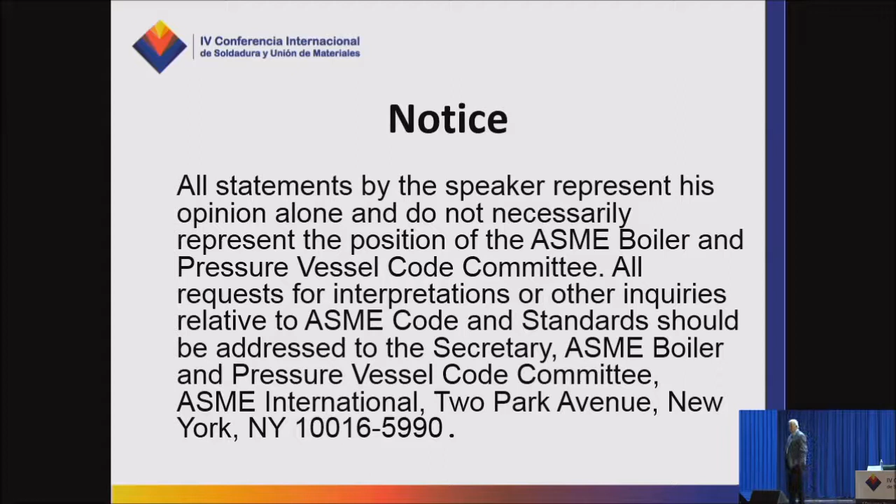As you heard in the introduction, I'm a member of various ASME committees. When you become a committee member, one of the things you agree to is that anytime you talk about the code and interpret it, you have to tell the audience that it's your personal opinion. So what you're going to hear is my personal opinion about the code, not the official opinion. So the code.

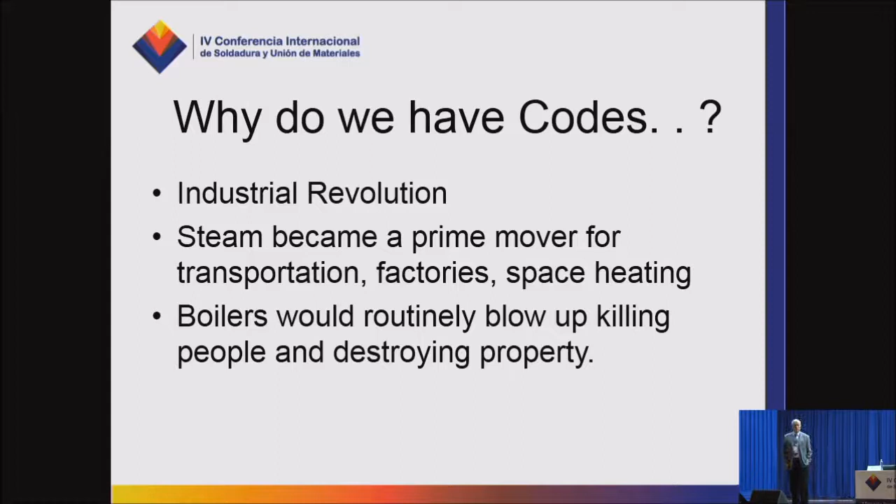Why do we have codes? Well, we have codes because we had an industrial revolution. Steam became a prime mover for transportation, for factories, for heating. In the 1800s, the early 1900s, boilers routinely blew up and killed people. It was not a good situation.

ASME got involved because ASME was already a recognized standards development body. In 1884, ASME published the Performance Test Code for boilers. It was a standard that allowed an organization to measure the power output of a boiler consistently and uniformly.

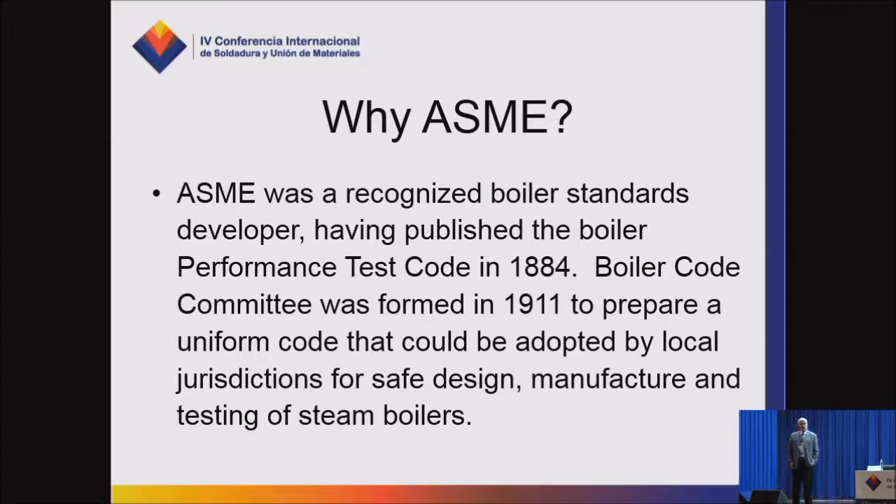The Boiler Code Committee was established in 1911, and it published the first boiler code in 1914. The boiler code was written so that it could be adopted by local jurisdiction to ensure safe design, manufacture, and testing of steam boilers. The first edition was 5x8 format, small, 119 pages long. Today, the boiler code is 8.5 by 11 format, and it's about this big, over 20,000 pages.

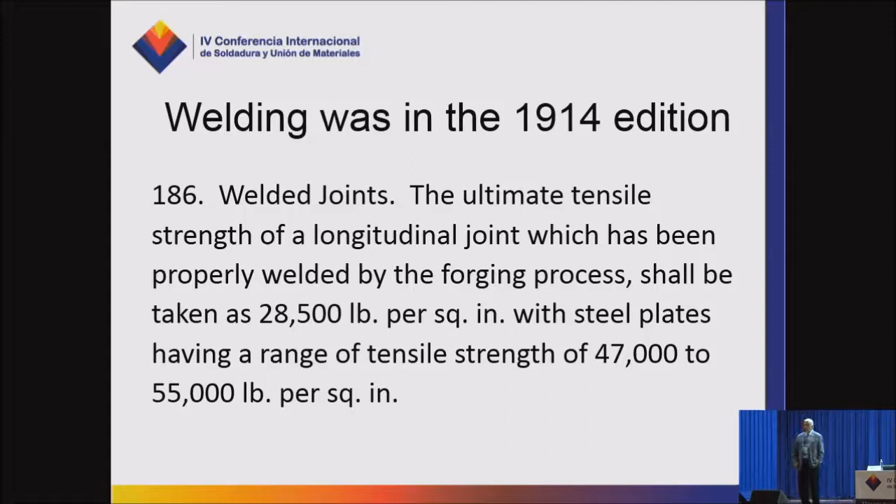Welding was included in the 1914 edition of the code. Who knew: welded joints, the ultimate tensile strength of a longitudinal joint that has been properly welded by the forging process, which hardly anybody uses anymore, shall be taken as 28,500 pounds per square inch with steel plates having a range of tensile strength from 47 to 55,000 pounds per square inch. So welding has been around for a long time and was in the early code.

The boiler code became the Boiler and Pressure Vessel Code in 1928 when Section 8 was published covering unfired pressure vessels. The rules on welding were contained in Section 1, Section 3, Section 8, Section 4. Wait a minute, did I say Section 3? Was there a Section 3 in 1941? There was indeed—it was locomotive boilers, steam engines. Section 3 was last published as locomotive boilers in 1948. In 1963, it became the nuclear code.

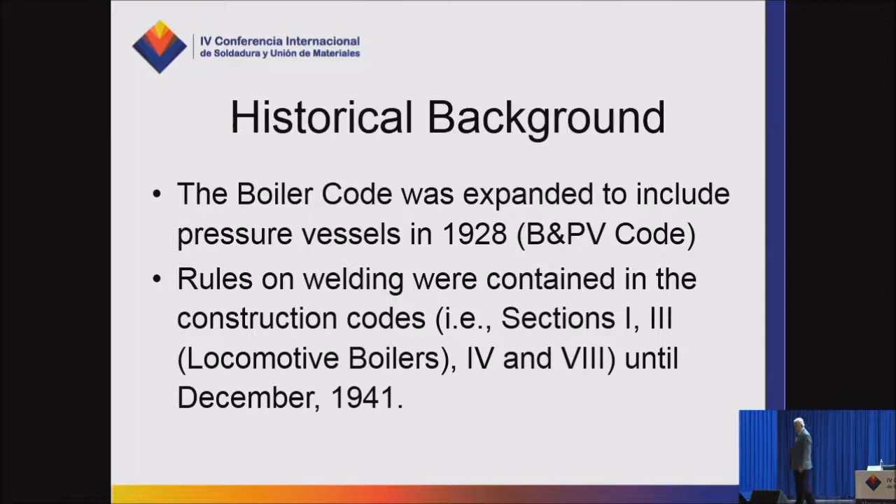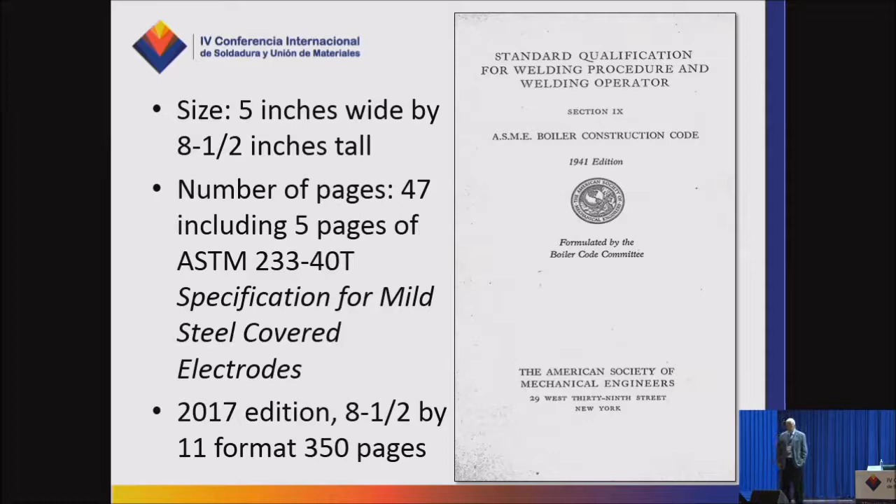Section 9, published in 1941, was at that time a 5x8 format, small book. It was 47 pages, 5 pages of which were a filler metal specification covering stick electrodes, today's 6010, 7010, 8010, and similar other electrodes, including sheet metal type electrodes. The 2017 edition of the code is 8.5 by 11 format and 350 pages long.

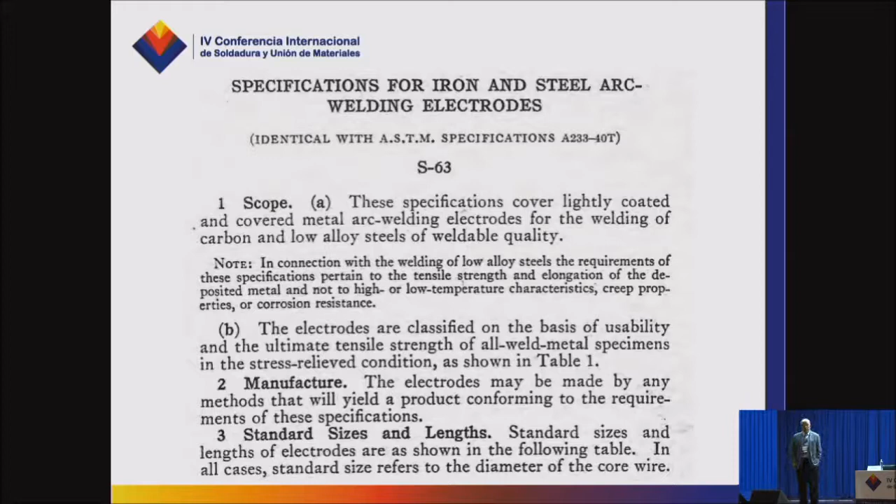The early edition of Section 9 had this specification, ASTM A233, which covered stick electrodes.

We know that the content of Section 9 included how to write a welding procedure, that is the technical content of the welding procedure specification—the direction that the welding engineer provides to the welder—and the qualification of that procedure, which is basically a test that demonstrates by mechanically testing a test piece that the joint will develop a strength level comparable to the base materials being used for the test piece.

It also contained requirements for testing welders, for testing welding operators at that time—we'll talk more about that later—for their ability to follow the welding procedure and to make a sound weld.

The details of construction, that is the joint designs—whether the joint was a single V groove weld, a fillet weld, how much reinforcement was required, whether any undercut was permitted, whether it had to be X-ray quality—all of that information continued to be present in the construction codes, that is in Section 1, Section 8, and so on.

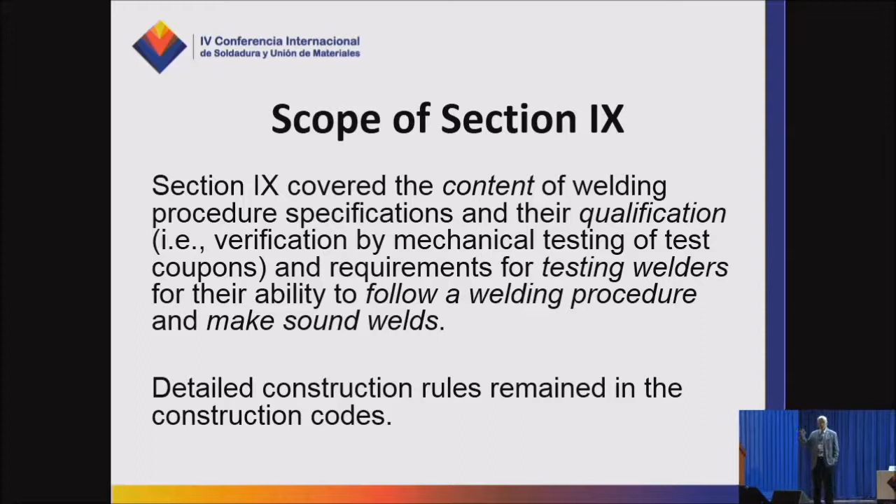So what Section 9 covers: how to write a welding procedure, how to qualify it, how to qualify the welders. If you look at today's code, it also covers the same thing for brazing and for plastic fusion.

The 1941 edition was different from today's code, but it's truly amazing how much was present in the 1941 code that we find today.

There were only 3 welding processes permitted: carbon arc, shielded metal arc, and oxy-fuel gas. I don't know anybody that uses carbon arc welding today. Lots of people still use shielded metal arc, good old stick welding, and there's still a little bit of oxy-fuel gas welding being done. The 1941 edition had forms.

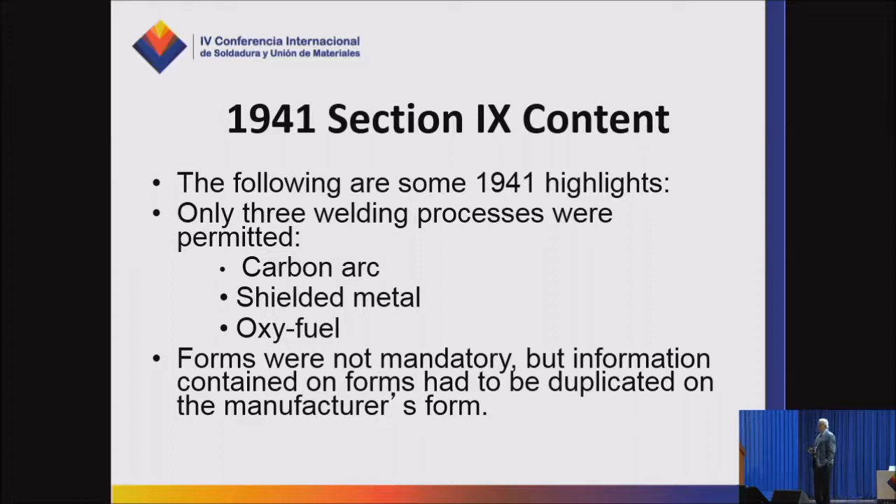They weren't mandatory, but they contained information that you were required to put in your welding procedure. So the early forms—this is an example of an early form.

It started out with specification number, date. It says the welding process shall be done by the metal arc process. The base material shall conform to the specifications for—and then you insert the specifications that this welding procedure covers. Then the filler metal shall conform to the classification number, and you fill in the blanks, and specification—insert the title of the specification. Welding shall be done in whatever positions are specified.

So it was really a simple way of writing a welding procedure, a lot easier than we have today. You just basically fill in the blanks.

Interestingly, the information that was covered in the forms is what we call non-essential variables today. That is, information you're required to include in the welding procedure, but it does not have to be qualified.

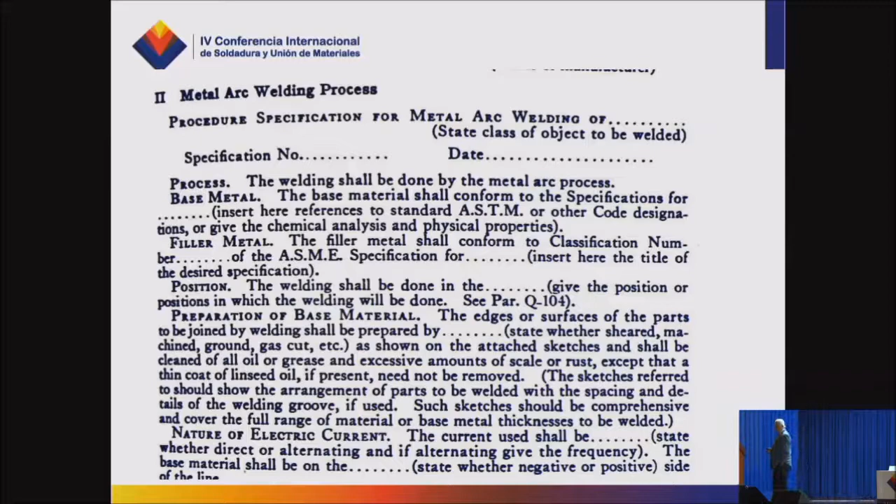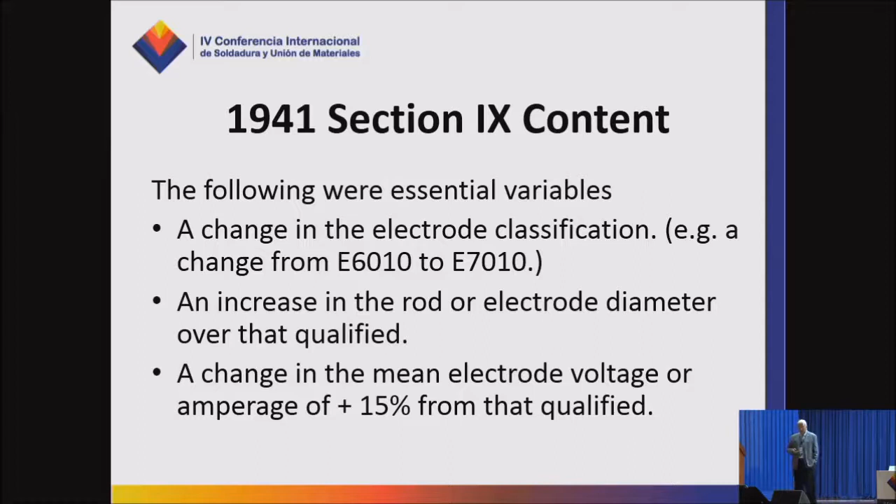The following were essential variables: a change in the electrode classification, an increase in the rod or electrode diameter, a change in the mean electrode voltage or amperage of plus 15% from that qualified, a change in the type of groove, a change in the number of passes plus or minus 25% in a groove weld. You essentially had to qualify what you were going to weld.

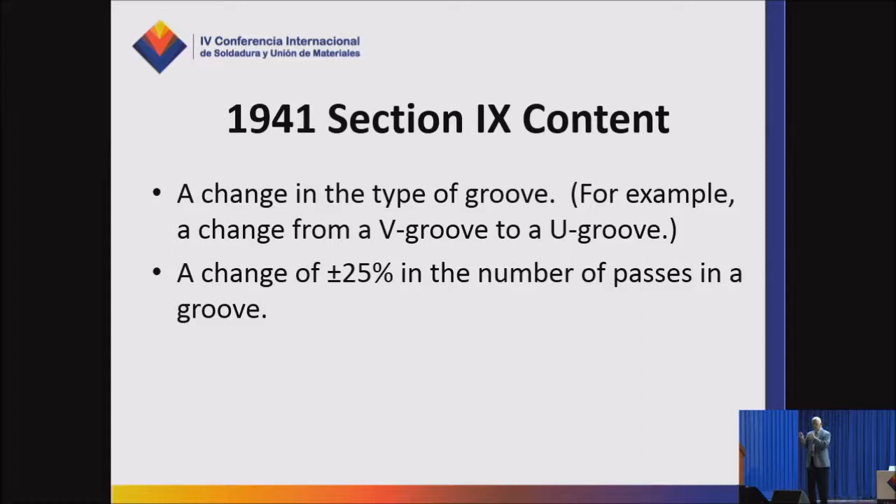It went on to talk about a decrease in the groove angle, a decrease in the root opening, an increase in the root face thickness, or addition or omission of a backing strip. If you changed any of those, as described here, you had to requalify. These are not variables today.

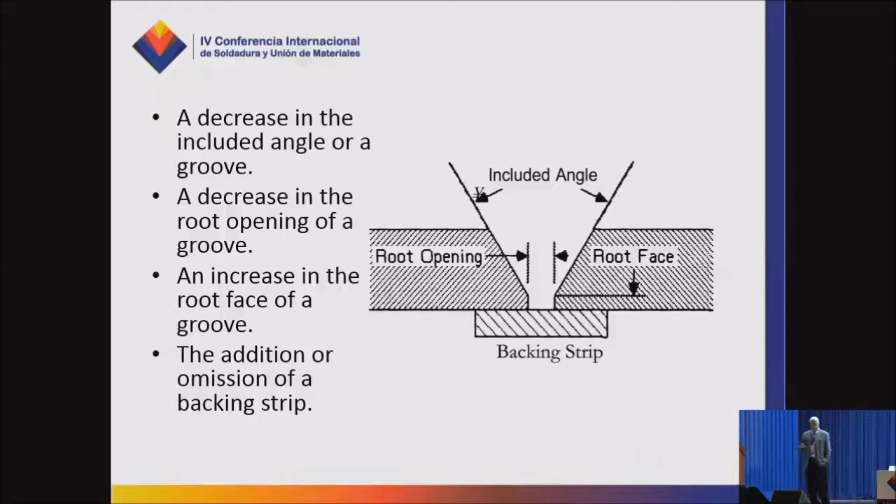A change in welding position—a separate qualification test had to be done for each position, and that included the flat position. So if you were going to weld overhead, you had to qualify the procedure overhead. If you were going to weld vertically, you had to qualify it vertically. Going to weld horizontally, you had to qualify the procedure in the horizontal position.

A decrease in preheat temperature, similar to what we have today, although today we say a decrease in preheat temperature, but the welding procedure can go 55 degrees C lower than what was used on the test piece. A change in the post-weld heat treatment temperature range—that's pretty tight. Today we have much more open requirements for qualifying procedures with post-weld heat treatment.

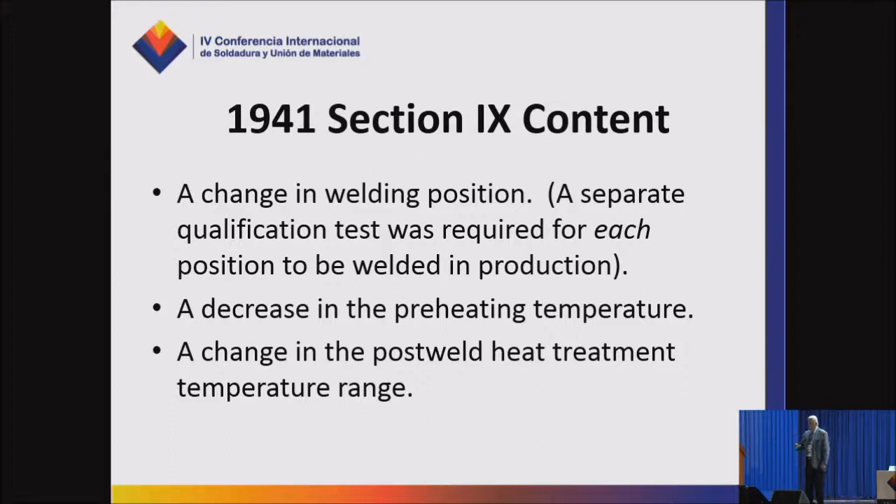Back in the good old days, a 3/8 inch thick qualification test piece qualified the production weld up to 3/4 of an inch in thickness. What we see here is what most of us that deal with the code are familiar with, it's the 2T rule. If you qualify a procedure using a test piece of some thickness, you're usually qualified for twice that, as a rule of thumb.

But it said that if you qualified the procedure on a test piece that was 1 inch thick, there was no upper limit on how thick a material you could weld. You might say, good grief, that's not very conservative. Keep in mind, this was 1941. Nobody was building anything much over an inch or so in thickness at that time.

2 tension tests, 4 bend tests were required for groove weld procedure qualification. Does that sound familiar? In the 1941 edition, same requirement as in today's edition. A free bend test was also required.

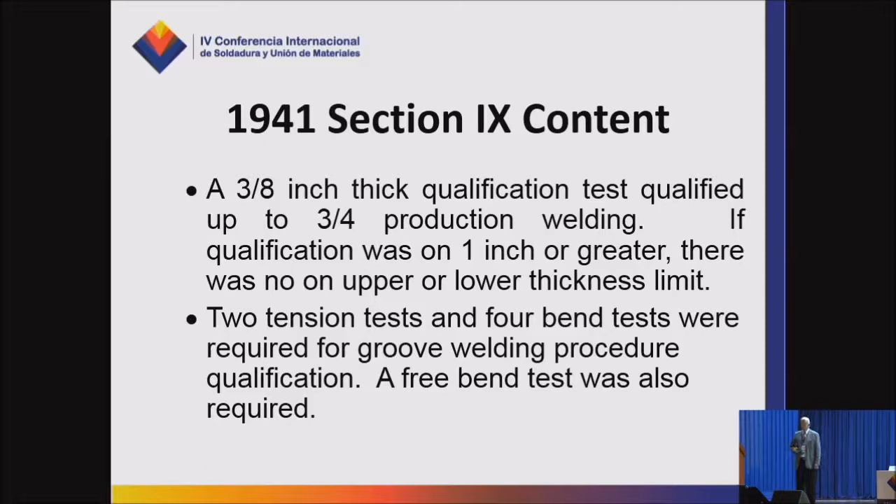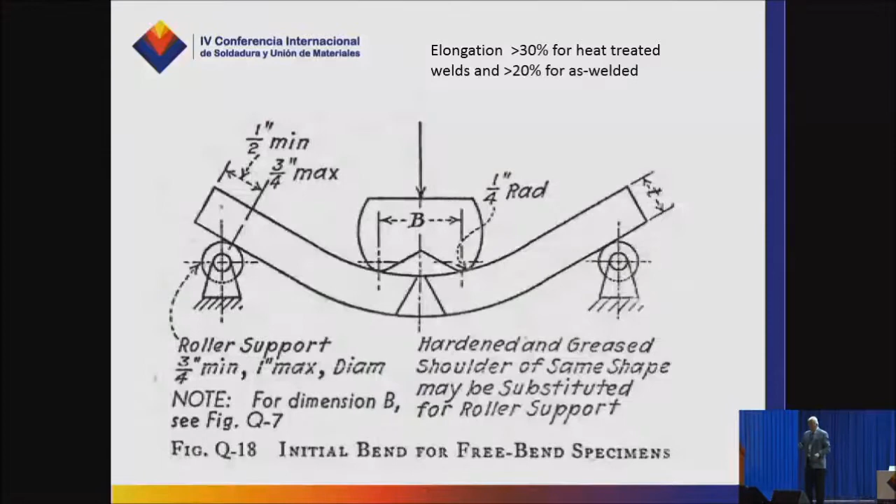What's a free bend test? You take a sample of the material, typically 1.5 inches wide, and put 2 scribe lines down just inside the toes of the weld. You put it in a fixture and bend it until the sides are parallel, then measure the elongation between those 2 scribe lines. The code said the elongation had to be 30% for welds that were heat treated, 20% for welds that were not heat treated.

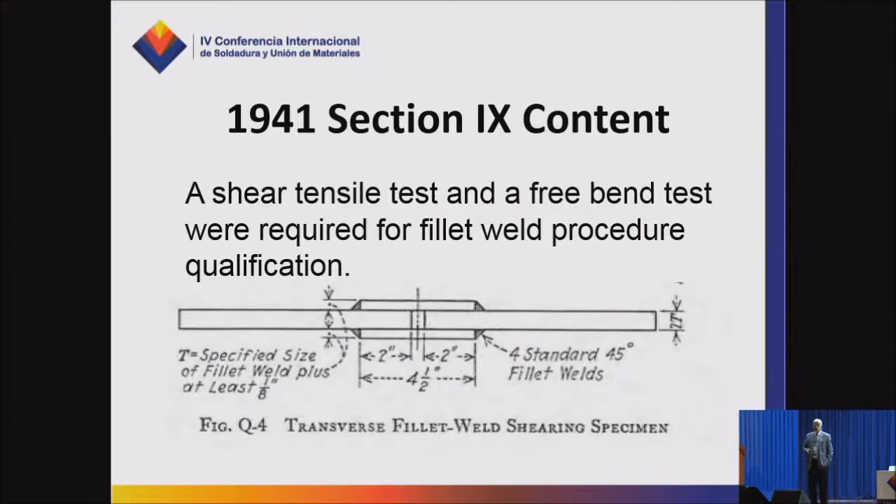You also had to do a tension test if you were going to make fillet welds. You had to do a tension test, a shear tension test, and a free bend test for fillet welds. A shear tension test looked like this. Then there is a second shear tension test where instead of the welds being transverse to the joint, in this case the welds are parallel to the joint. You had to do a tension test.

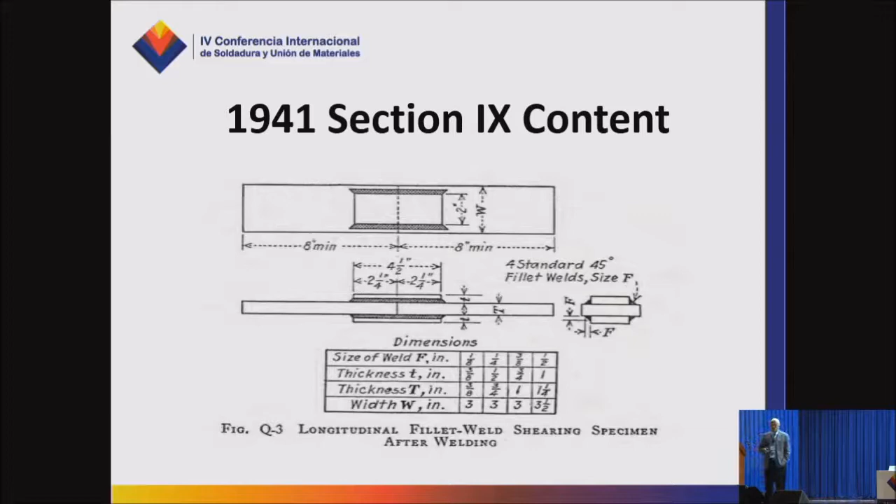And it had to pass certain criteria. So today's rules say a groove weld qualification qualifies all fillet welds. In 1941, if you were going to make fillet welds, you had to qualify fillet welds separately.

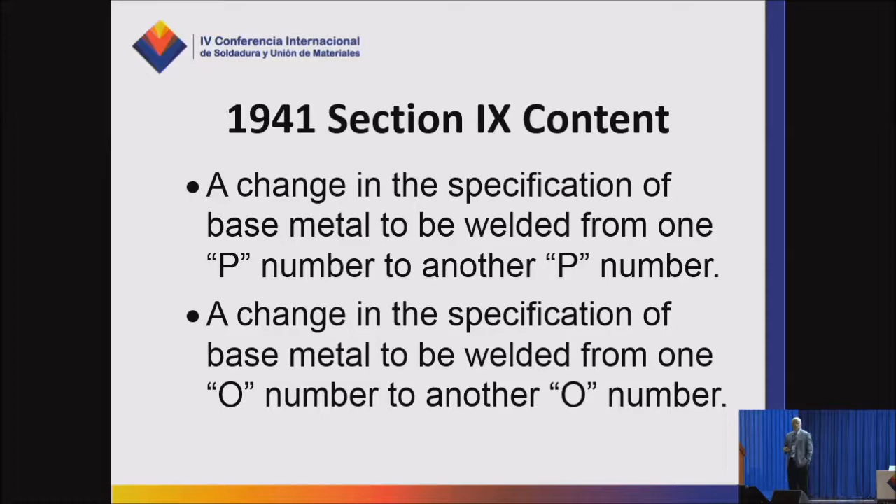A change in the base metal specification from one P number to another P number - boy, does that sound familiar. That's exactly what the code says today, almost, not quite. It goes on to say a change in the specification from one base metal welded from one O number to another O number. What's an O number? Well, lo and behold, there is a P number table in the 1941 edition of the code, a listing of materials that groups materials of similar welding characteristics together for purposes of qualification. If you qualify any material in that group, that test qualifies all materials in that group.

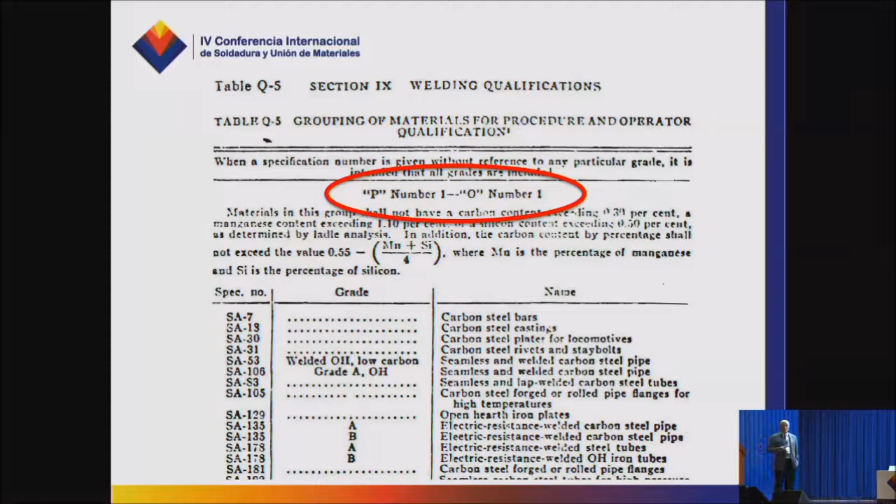You'll notice that it says P number 1, O number 1. If we go down further to P number 7, we see it's P number 7, O number 2. Well, P number 7 materials are what are today P8s, the austenitic stainless steels. They required separate qualifications. So what's the deal with O number?

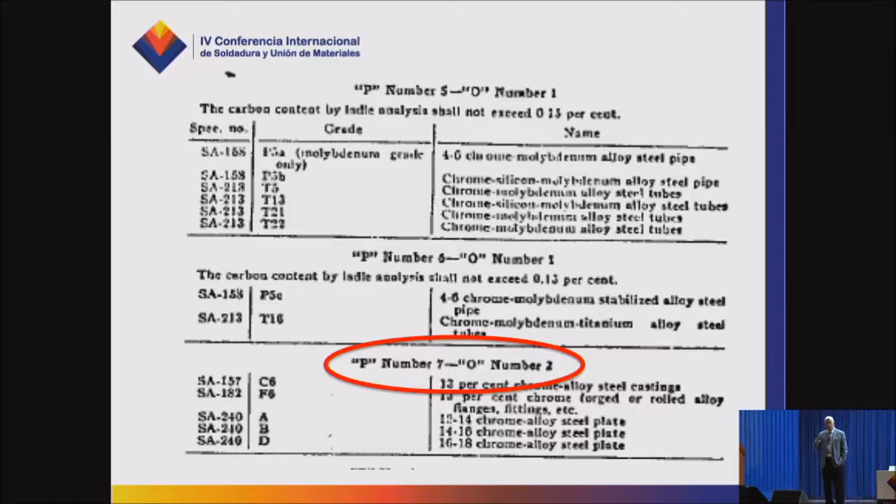That's coming, patience, right? There were P numbers and O numbers. P numbers were grouping materials for procedure qualification, similar to today's P numbers with some slight rearrangements. O numbers were a grouping system for operator qualification. The person who did the welding back in 1941 was known as an operator. So there were two systems in place, one for procedures, one for operators.

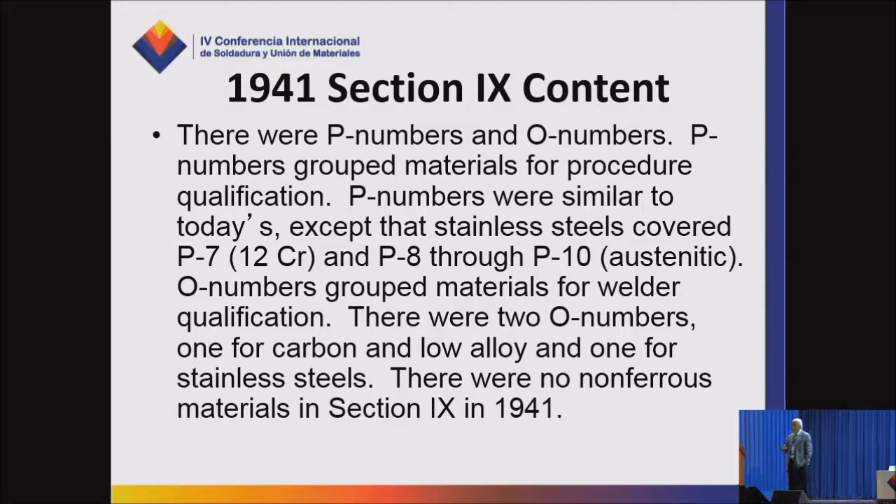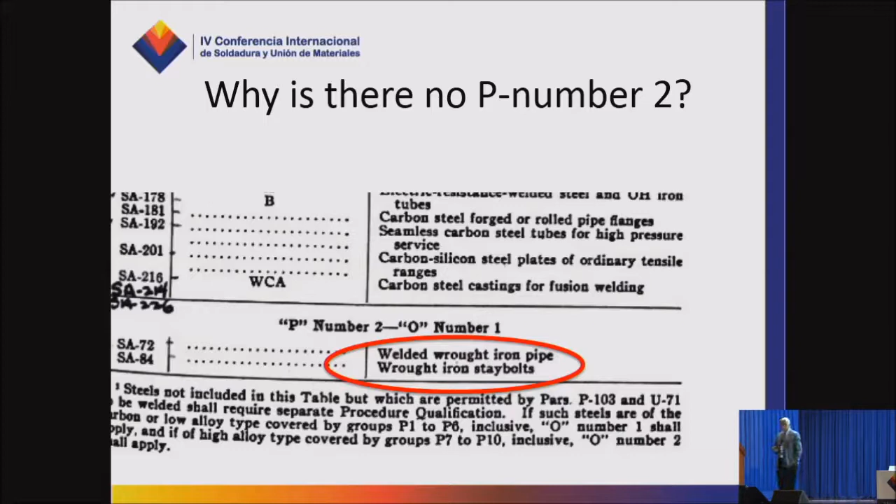I'm sure a lot of you who have dealt with the code have asked yourselves, why does ASME call P numbers P numbers? Why didn't they call them M numbers for materials, or simply material grouping numbers? Well, here's why: back in 1941, there was a grouping system for procedures and a separate grouping system for operators. And the other question you've probably asked yourselves: why is there no P number 2? There's P number 1, and then the code jumps to P number 3. Well, in 1941, there was a P number 2 - it was wrought iron. Nobody makes wrought iron anymore, I guess, so it's gone since we don't use it.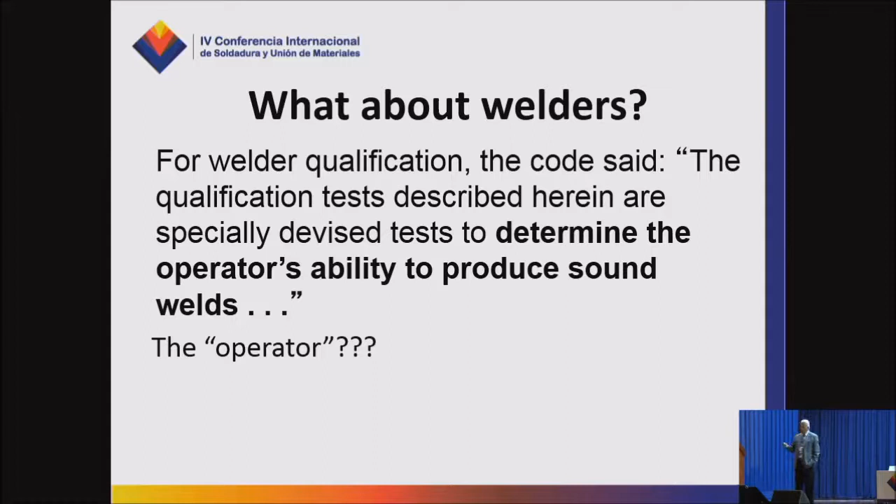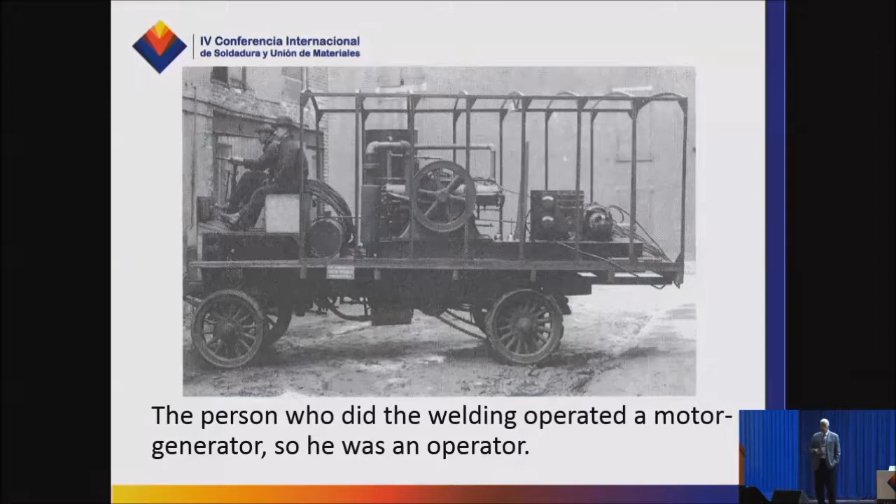So, procedures - we've seen a lot of similarities. How about welders? For welder qualification, the code said qualification tests described herein are specially devised to determine the operator's ability to produce sound welds. So, operator - why did the code call the person doing the welding an operator? That's because the person doing the welding operated this machine, a motor generator set - a diesel engine, gasoline engine, or AC motor that turned a DC generator. So the operator operated that piece of equipment, and the person doing the welding was known as an operator.

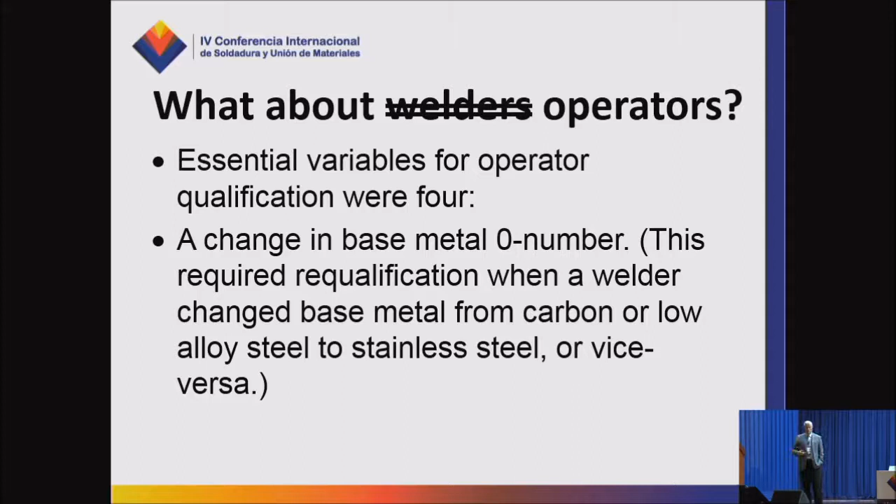So what about operators? Essential variables for operators - there were 4 essential variables for operators. A change in base metal O number. Looking at the table, there were only 2 O numbers: O number 1 for carbon steels and low alloy steels, O number 2 for stainlesses.

A change from one filler metal specification to another. There were 3 filler metal specifications: one covered carbon steel electrodes, another covered low alloy steel electrodes, and the third covered stainless steel electrodes.

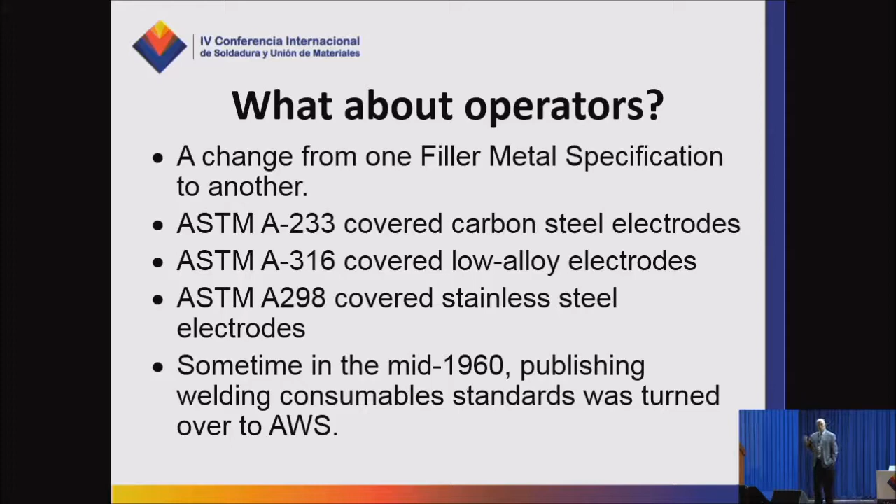Sometime in the mid-1960s, ASTM stopped publishing filler metal specifications and turned that job over to the American Welding Society. The American Welding Society today publishes the A5 series filler metal specifications.

So why are filler metal specifications in ASME identified as SFA specifications? You've probably looked at that and scratched your head and said, I have no idea why they call them SFA specifications. Well, the explanation is pretty straightforward.

When ASME adopts a material specification for boiler code construction, ASME goes to some other standards publishing organization like ASTM. That standard is reviewed by Section 2 committee, a materials subgroup committee or materials standards committee.

And it has to meet certain criteria. The material has to have defined chemical composition, defined tensile strength, yield strength, elongation. If it's going to be used for low temperature service, it has to have toughness requirements. It has to have certain characteristics that allow code users to be confident that material will be what it is supposed to be when installed in a boiler or pressure vessel.

And after Section 2 committee gets done reviewing it, they say this material is now special. So ASME publishes SA 106, Special A106.

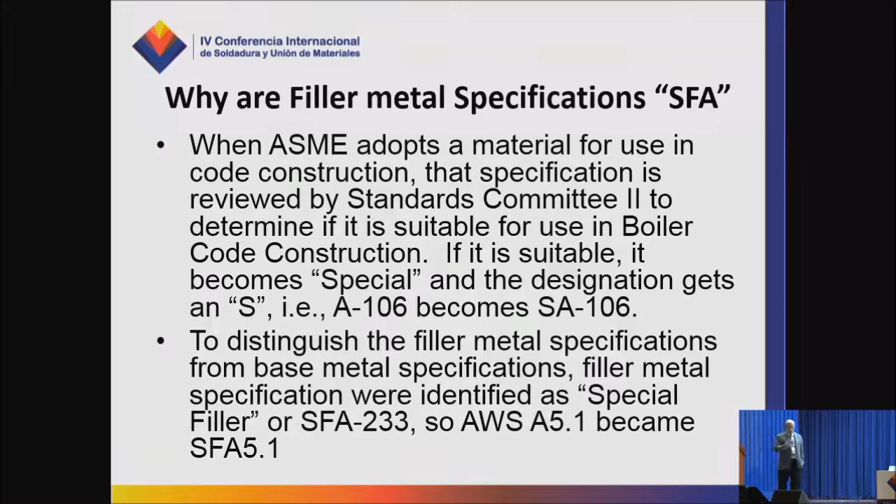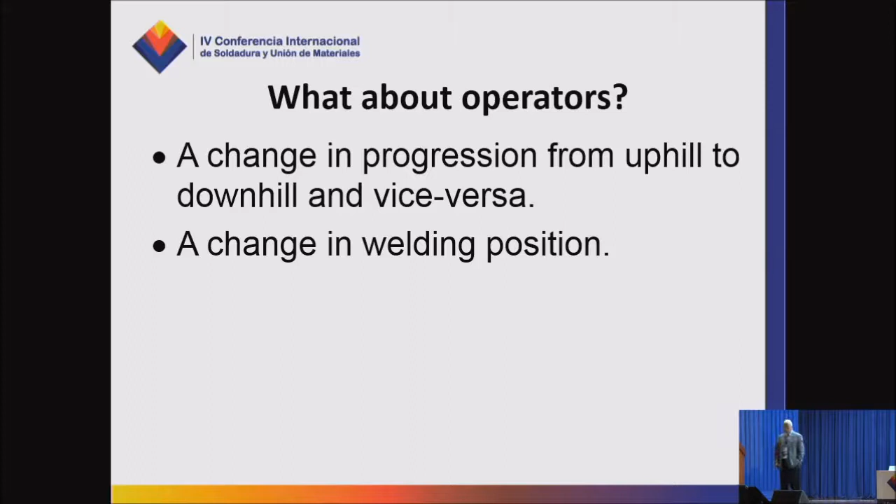What about operators? Continuing on, a change in progression from uphill to downhill and vice versa. There's another one that has not changed since it was introduced to the industry in 1941: a change in welding positions.

Welding positions, 1941 edition. You had 1G, 2G for horizontal tests, 3G for vertical, 4G for overhead, 5G for pipe tests. There was no 6G, and there was also no OG position.

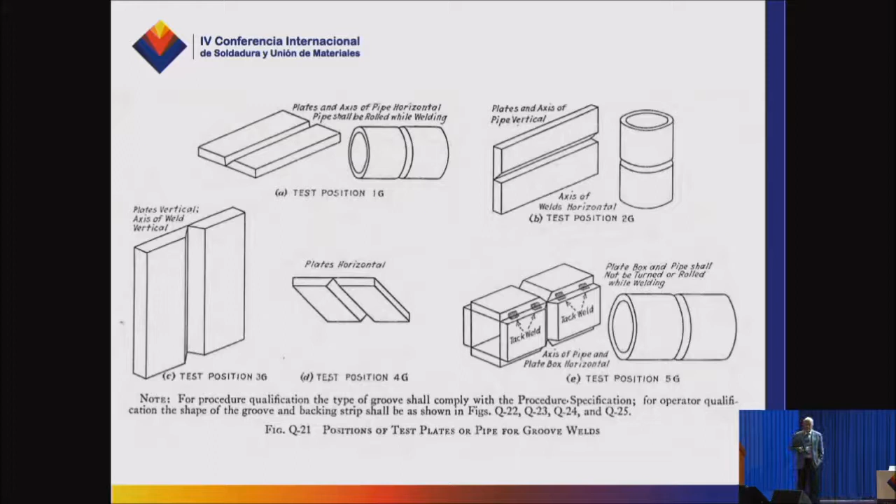Bad joke, sorry. Right? So for fillet welds, you had the 1F, the 2F, the 3F, the 4F, fillet weld test positions.

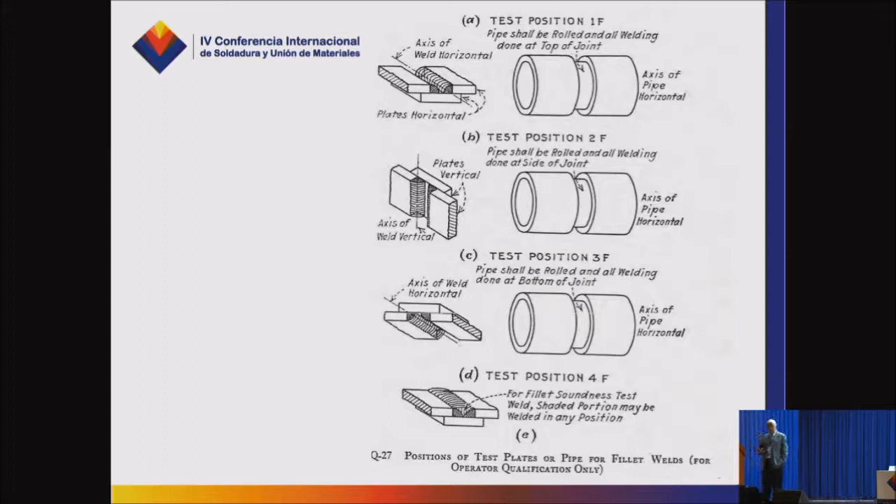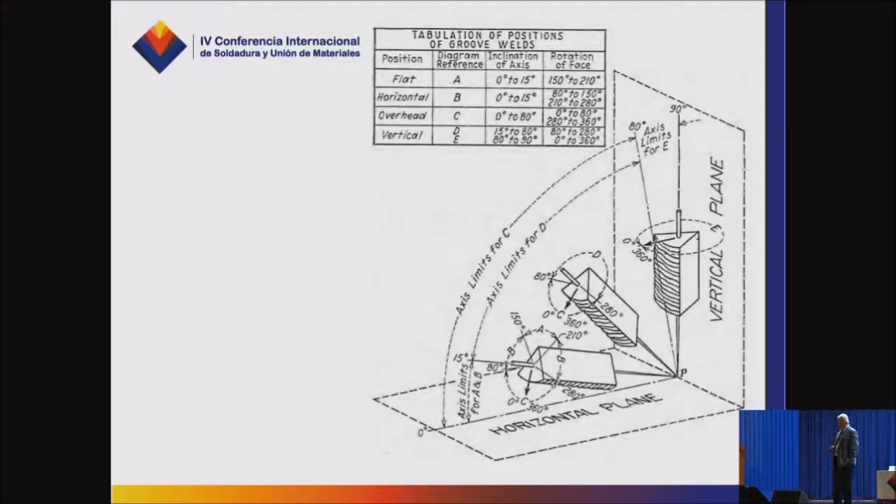And then this diagram, which I'm sure all of you can sit down and explain to me thoroughly, because it's such a simple diagram to read and understand. Actually, no, it's not. Once you figure it out, it's a pretty cool diagram, works like a charm, but it's been in the code since 1941.

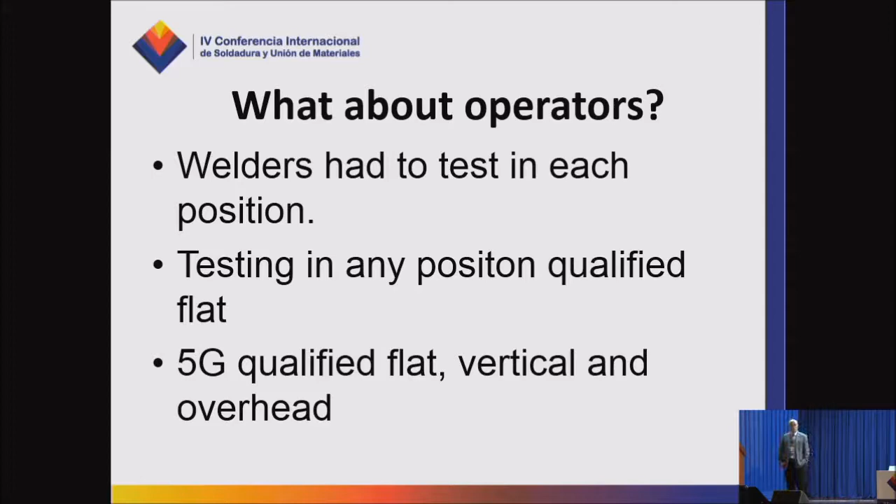What were the testing requirements? Welders had to test in each position. Testing in any position on plate also qualified flat, same rule we have today. If a welder can weld horizontally, vertically, or overhead, he can weld flat. 5G qualified flat, vertical, and overhead.

What about the testing of welders? What kind of test did the welder have to take? Well, if a welder was going to use groove welds and fillet welds, he had to do a groove weld test, and he also had to do a fillet weld test. Groove weld test on 3/8 inch thick material qualified the welder to 3/4 of an inch in thickness, same as procedure.

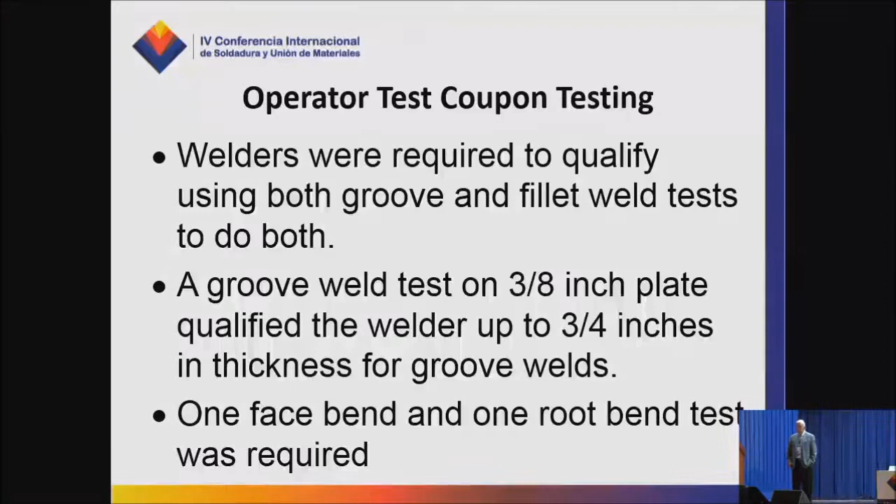One face bend was required. One root bend was required. A 1 inch thick test gave the welder unlimited thickness. You had to do 2 side bends if it was a plate test. Acceptance criteria: no crack or other open defect exceeding 1/8 inch in length.

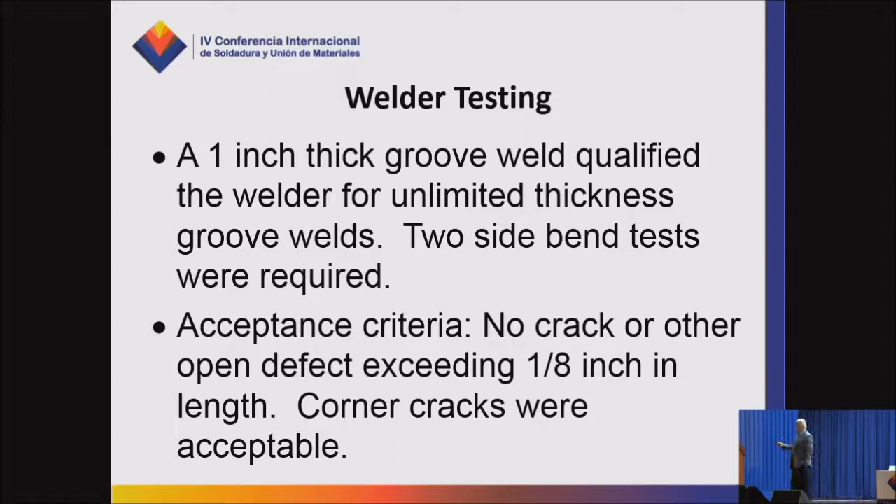Corner cracks are acceptable, same thing we have today, so it's been in the code forever. If you tested the welder on pipe, because pipe positions were multi-positions, you had to do 4 tests.

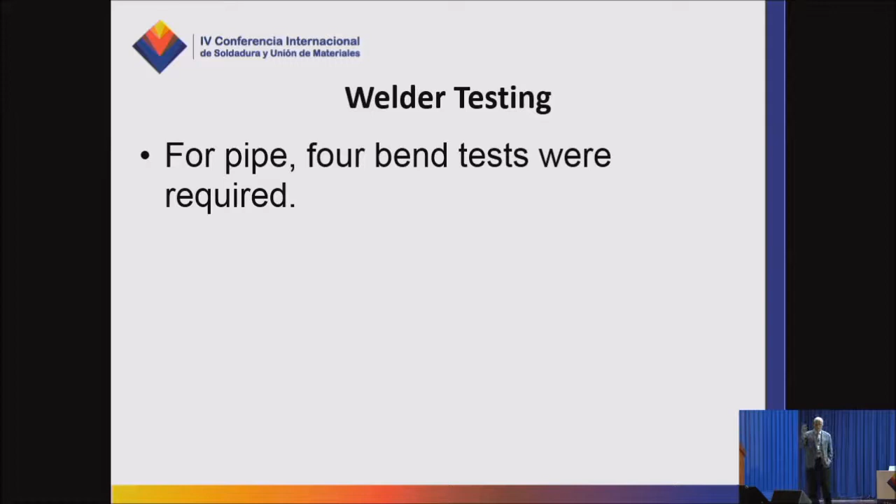The testing on pipe, however, was different from today. When you take out your bend test specimens on pipe, they took them out at the 3, 6, 9, and 12 o'clock positions rather than at the 45-degree marks where we take them out today.

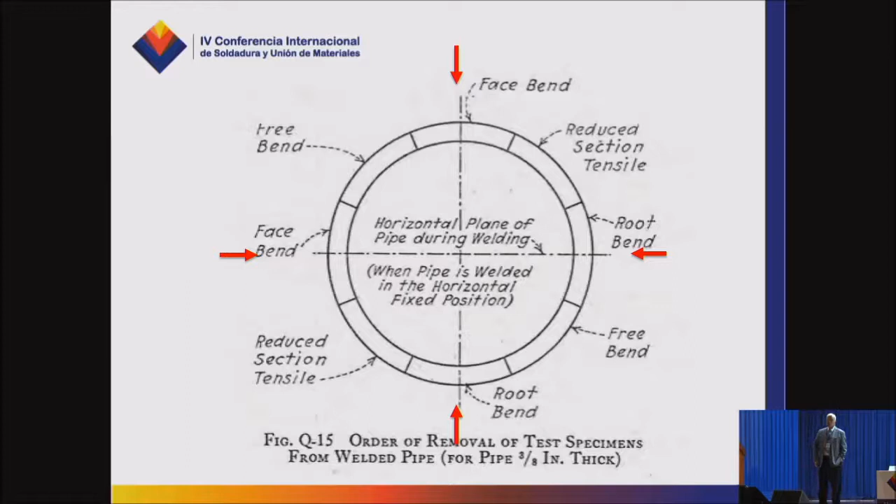So that's changed. There was some discussion here several years back when we were trying to get ISO 9606 and Section 9 to match up better. The ISO 9606 standard had inadvertently been changed to have its test specimens removed, as you see in this example on the screen. Was not intended, I don't think, but we ultimately discussed where bend test specimens should be removed. And the argument was made that probably the most difficult position for a welder to make a weld on a piece of pipe is coming down from underneath, up and around, on the inside, on one side of the weld. That 45-degree mark was really a challenge for the welder to make a sound weld. So the ISO committee agreed to put the bend test specimens in the same location that ASME has. So that was a good thing.

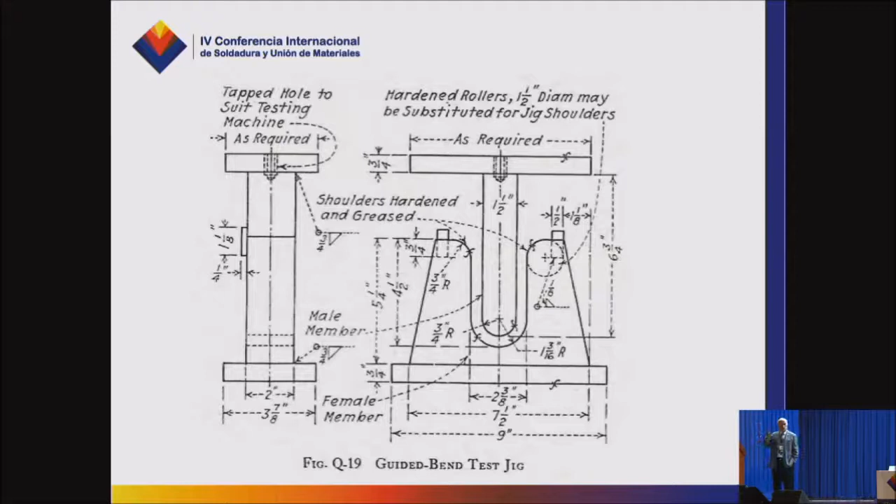Section 9 in its early renditions only covered carbon, low alloy, and stainless steels. All those materials could withstand 20% elongation in a bend test fixture, so the standard bend test fixture took your bend test specimen and wrapped it around a 2T radius, so a 3/4 inch thick specimen, you wrapped it around a 1.5 inch radius, or a 3/8 inch thick specimen, you wrapped it around a 3/4 inch radius. That put 20% strain in the outer fibers of that bend test specimen. That rule is still with us today.

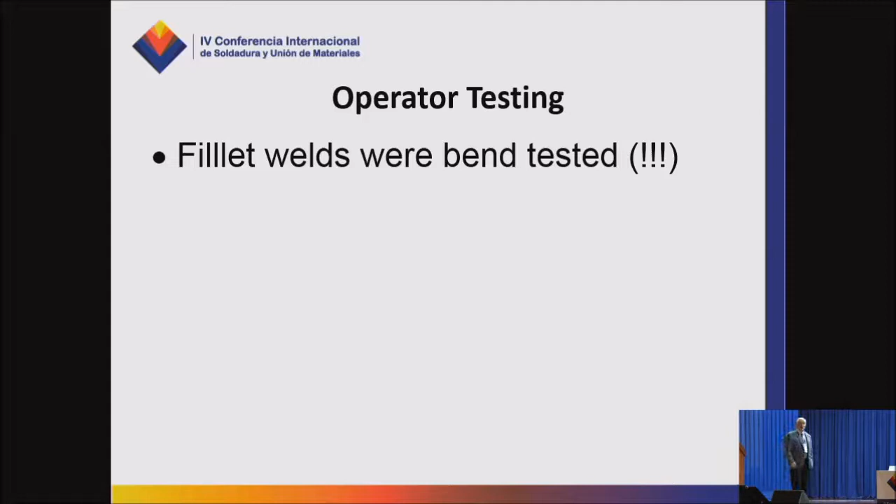Section 9 required that you bend test welder fillet weld tests. How do you do that? Well, the welder welded up a test piece. It'd be a piece of plate. You cut a strip out. But what the welder did was he had a square groove and a gap, and he put 2 fillet welds in on both sides on a backing strip, and then filled it out. And then what you did was you removed the weld reinforcement, you removed the backing strip, and you put that specimen, with the root side downward, back in this fixture. If there was any incomplete penetration on the root side, the specimen would fracture. So actually a pretty cool test.

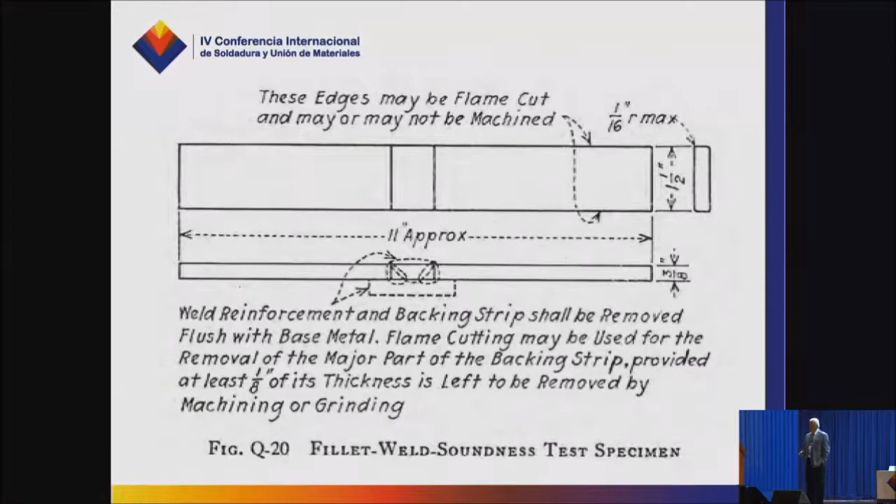This is an interesting paragraph. Retesting. If an operator is given an immediate retest, the operator shall make 2 tests, both of which must pass. If there's evidence that the operator has been given further training, a complete retest shall be made. We read the code today, and what it says is pretty simple. If the welder fails the test and you give him an immediate retest, he jumps up and down and says, I can do this, I want to take another test - he has to take 2. If you send him over in the corner and say, go practice, learn how to weld a little bit more, and maybe tomorrow when you come back we'll give you the test again, and I won't stand over your shoulder and make you nervous while you're welding your test coupon - so give him more training, he only has to do 1 test.

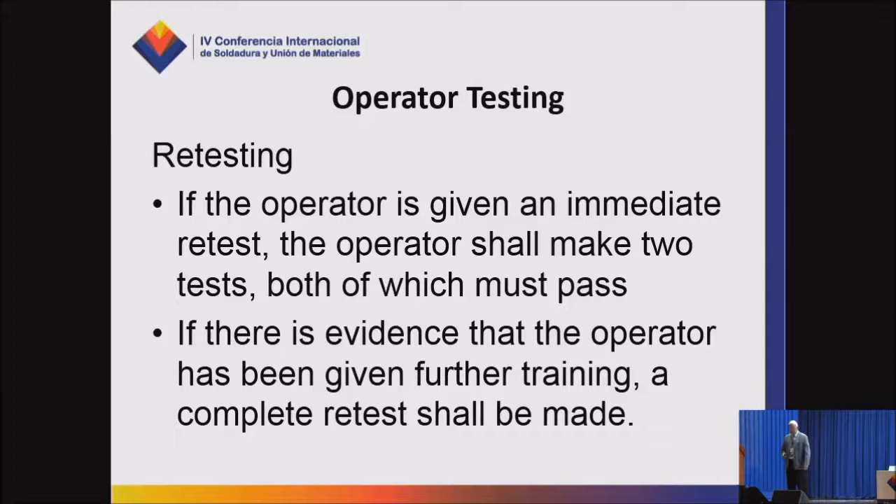There was a 3-month rule. If a welder didn't use the process every 3 months, he had to retest. That became a 6-month rule in the mid-1980s. So in my early career, when I had to deal with welders and make sure they stayed qualified, it was every 3 months you had to make sure the welders had welded with the process, and otherwise they'd lose their qualification.

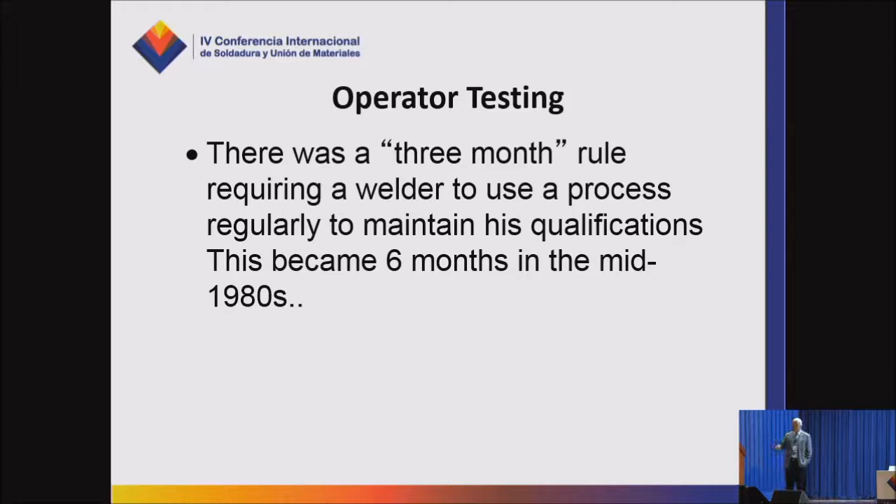Moving forward, Section 9 had no really big changes during its first 10 years. New section on welding non-ferrous materials - actually, I guess it was a big change. A whole new section, welding non-ferrous materials, was added in 1948. The early edition only covered ferrous materials; we added non-ferrous.

In 1952, there was some good clarification and separation of welder qualification requirements from procedure qualification requirements. If you look at the rules that were there for welders and procedure qualification, they were pretty similar. A very important aspect of working with Section 9 is to recognize that when you're qualifying a procedure, you're demonstrating the properties of the weld. And the things that affect the properties of the weld are different from the things that affect the welder's ability to deposit sound weld metal. The code clearly reflects those two differences. So a secret of using Section 9 is to be sure you're only using the rules for procedure qualification when you're writing and qualifying a procedure, and don't confuse the rules for procedure with the rules for performance.

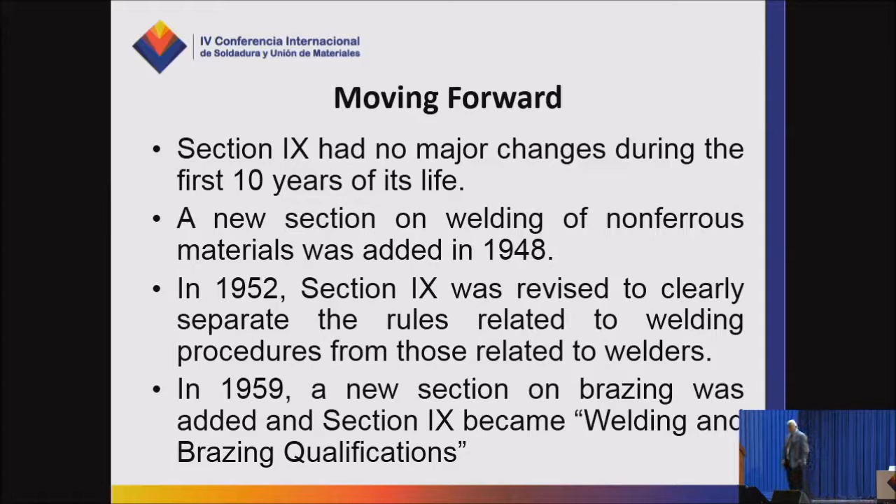In 1959, a new section was added on brazing, so Section 9 became welding and brazing qualifications. In 1974, the code was rewritten into today's format, with tables and separate tables for each process. Go back to the 1971 and earlier editions of Section 9.

Everything was in text. All the processes were identified and all the variables were identified. For shielded metal arc welding, you did this. For submerged arc welding, you did that. For gas metal or for fuel gas welding, you did that. For gas metal arc, you had to deal with that.

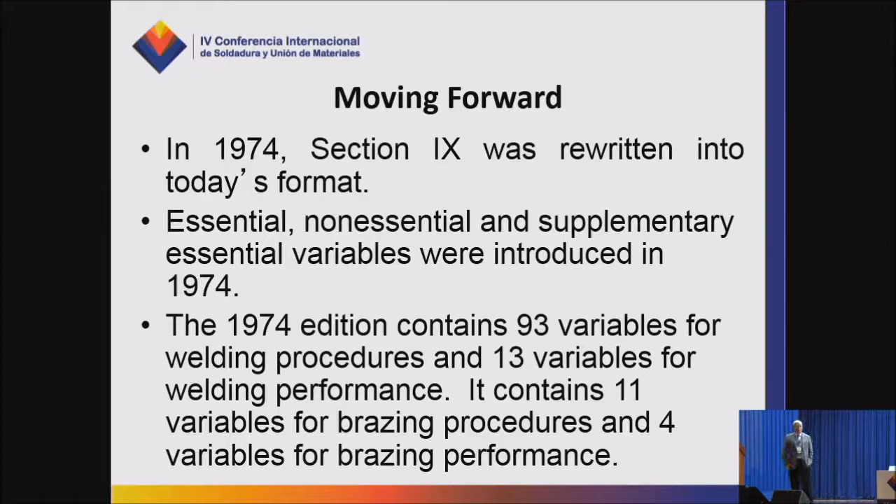In 1974, we introduced the tables with the variables: essential, non-essential, supplementary essential. At that time, there were 93 variables for procedures, 13 variables for performance, 11 variables for brazing procedures, and 4 variables for brazers.

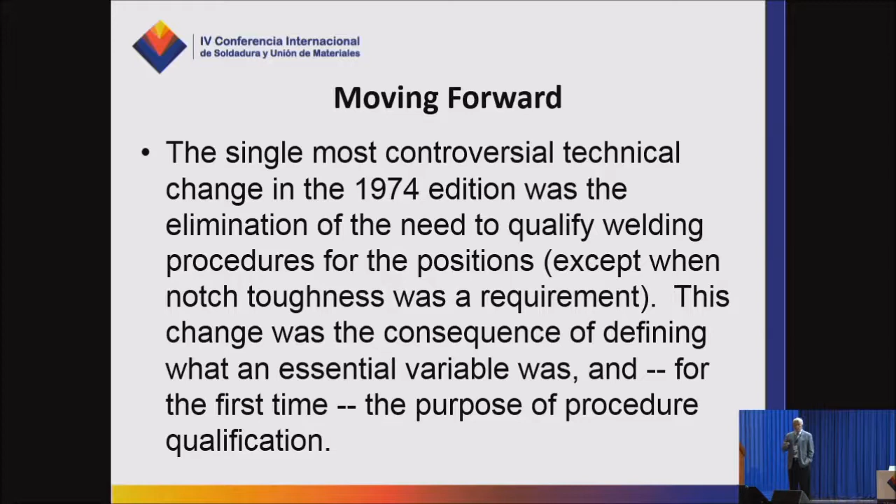The biggest and most controversial change that occurred in 1974 was the elimination of position from the requirements for procedure qualification. That is, prior to 1974, as I mentioned earlier, if you were going to weld in vertical position, your procedure had to be qualified in vertical position. That was eliminated in 1974 because, for the first time, Section 9 defined why you qualified welding procedures.

What Section 9 said was that the purpose of the welding procedure specification and procedure qualification record is to determine that the weldment proposed for construction is capable of providing the required properties for its intended application. If a change in a welding condition did not affect the mechanical properties of the joint, it was not going to be an essential variable.

The underlying assumption is, of course, that the welder made a sound weld. So if you have a sound weld and you make the weld in a flat position, a vertical position, a horizontal position, or overhead, does that change the properties of the weld such that you can measure a difference consistently and uniformly? No. If you have a sound weld, the weld doesn't know and it doesn't care what position it was welded in, unless you're welding unobtainium. If you're welding unobtainium, it knows and it cares. But unobtainium's not in the code, so good luck getting unobtainium.

I would point out here that this is one area where research data is important. We use whether or not a welding condition affects the mechanical properties of the weld as a basis for determining whether a variable is essential or non-essential, and we do that based on research work that people have done. So those of you who are doing research, thank you. Keep up the good work.

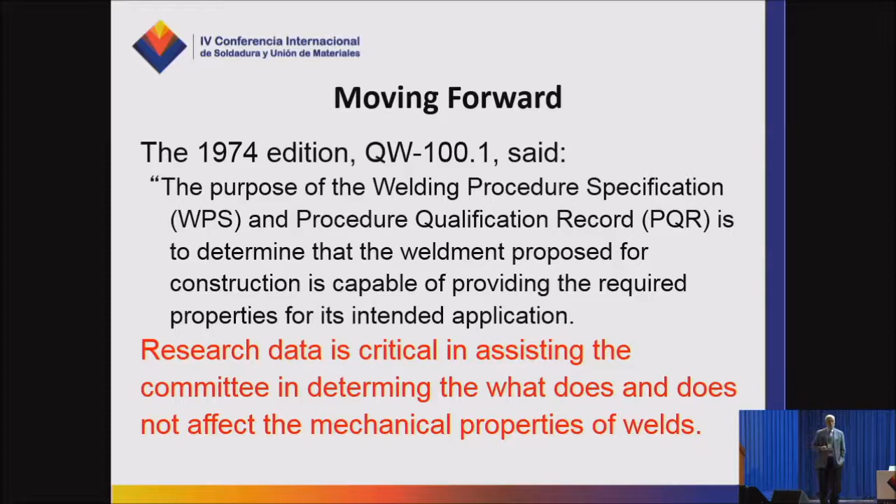Since 1974, changes have been incremental. We've added new materials. In fact, you open the code up and probably 25% of the pages in the code are the P-number tables for new materials. New welding processes: Section 9 had 3 in 1941. We have 20 welding processes today, including hybrid welding, where you're doing laser MIG or laser TIG or some hybrid variations, and the code is wide open on the number of hybrid variations that can happen.

In the 2000 addenda, we allowed people to use standard welding procedures. The American Welding Society in the 1990s decided to gather data from the industry and write a collection of standard welding procedures for materials we knew how to weld: carbon steel, stainless to carbon, TIG welding, stick welding, MIG welding, flux core welding. AWS wrote a collection.

Right now there are probably 40 standard welding procedures published by the American Welding Society. Instead of going into Section 9, reading QW 200, buying test coupon material, doing your tension tests, doing your bend tests, maybe spending $2,000 or $3,000 going through that process and writing the procedure and then submitting it to your customer to get it approved, instead of doing that, you can go to AWS and for, I think it's $275, buy a standard welding procedure.

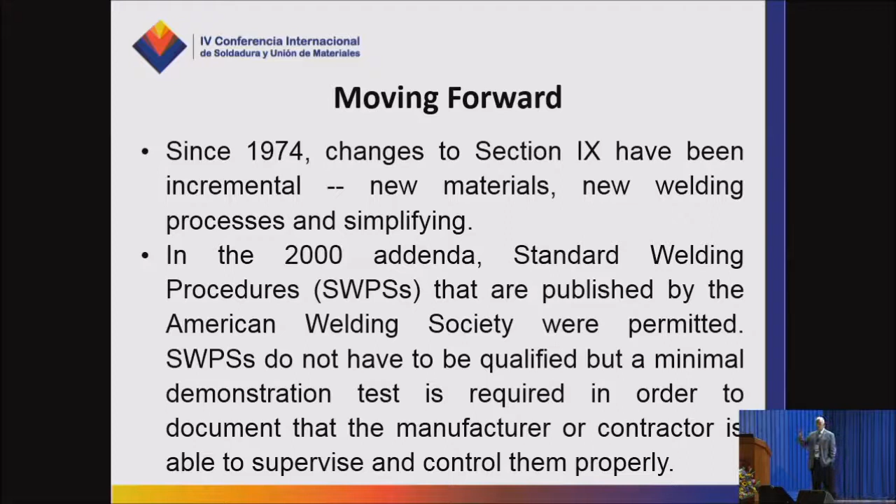Standard welding procedures cover material thicknesses from 1/8 of an inch up to 1.5 inches. Carbon steels in the as-welded and heat-treated condition. Stainless steels, as-welded condition. Stainless to carbon, as-welded condition. So if you're involved in construction where you need a welding procedure, the first place you should be looking is standard welding procedures.

In 2013, we added plastic fusion. Section 9's name changed again, from welding and brazing to welding, brazing, and fusing.

In Section 9, we also added Part QG in 2013. What actually happened in 2012 was we had written the QF requirements for plastic fusion. And of course, when you write standards, you don't sit down with a blank piece of paper and start writing a standard. What you do is find something similar and modify it. What the plastic fusion task group did was take QW, and where it said welding, they changed it to plastic fusion. All the administrative requirements that were in the welding section were going to be repeated again in the plastic fusion section. So the committee decided to take all that administrative stuff out and put it in QG as a standalone section. That way, we didn't have to worry about every time we changed an administrative requirement in QW, we also had to go change it in QB and in QF. So the administrative stuff got extracted.

Section 9 committee meets 4 times a year. The dates of committee meetings are published on my website, and they're also published on ASME's website. Section 9 committee meets on Monday. That's where the working groups are, and that's where the fun is. We have all the technical discussions at working group meetings on Monday of Code Week.